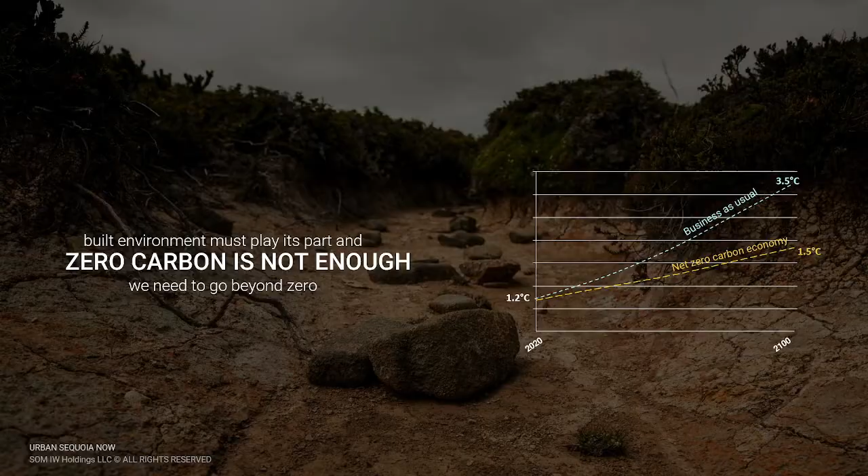So this premise would say, can cities, instead of being the primary contributor to global emissions, become part of the solution? We believe emphatically yes, that buildings can actively absorb carbon and that buildings can perform like trees. And this was our provocation at this pavilion last year at COP26. We made this provocation, can buildings act like trees?

And we proposed that with current technologies, with a combination of biomaterials, nature-based solutions, and active technologies like direct air capture, we could absorb more carbon than we emit. And this idea received tremendous support. And we've spent the last year focused on developing this very specific idea with engineers, with carbon specialists, with architects. And so we've been working to shift from concept really to reality.

And what I want to share today is focusing on one specific building typology, tall buildings. We've taken tall buildings, high-rise construction, as an important solution to urban density, but also as one of the primary contributors to carbon emissions and also one of the most challenging to address.

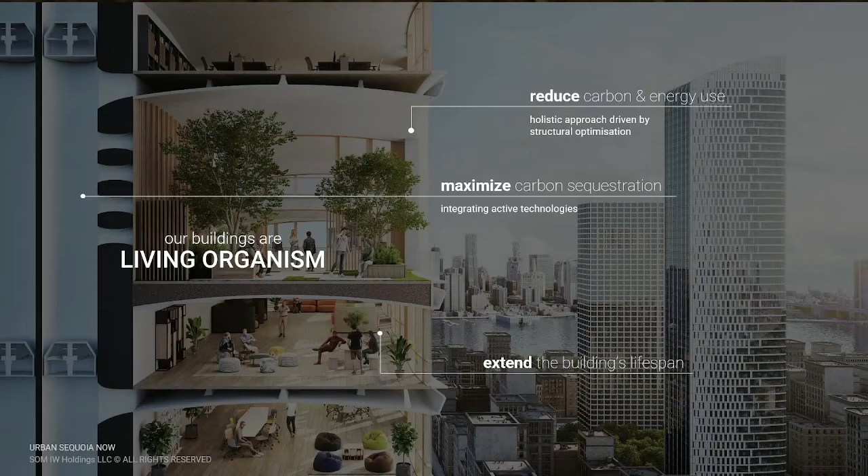So in order to do this, this is a scalable idea from small to big. We're focusing on tall, and that scalable idea means that we have to shift our thinking. We have to shift our point of view to think about buildings not as a static compilation of materials, but as living, breathing organisms themselves. And we have to think holistically about a dramatic reduction of carbon in the buildings to begin with, also maximizing carbon sequestration and extending the lifespan of those buildings.

So we, in this process, asked ourselves a series of questions. These are simple questions, but they're questions that you have to ask every step of the way in designing, from the smallest decision to the largest decision. As we're working on a holistic design, just how low can we go relative to upfront embodied carbon? How far down can we take that? And also, how low can we go relative to the active use of energy in the building?

And opposing that, how high can we go relative to carbon sequestration? Can we actually sequester more carbon than we've emitted? And how high can we go relative to energy production on site? And finally, we ask ourselves, just how long can we extend the lifespan of the building? Can we go beyond a conventional 60 years? Can we go to 100 years and really expand that whole life carbon cycle?

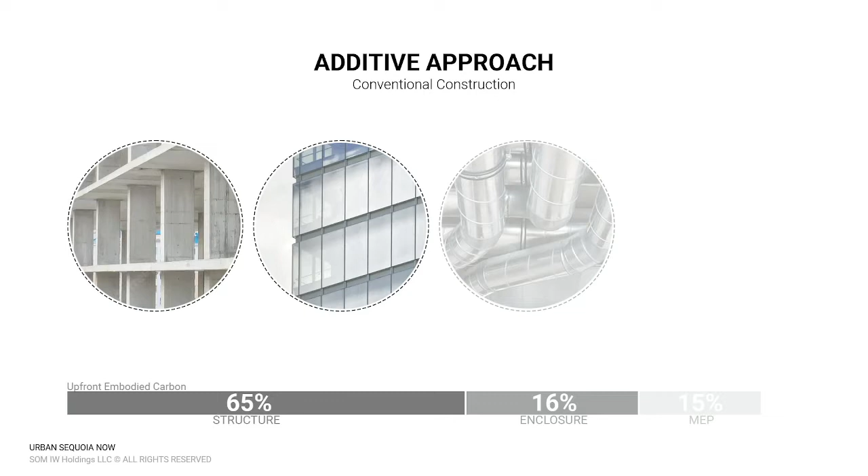So how do we do this? What are the specifics of this? First, we have to think very specifically about how we're building today. And today, all construction, and particularly high-rise construction, is sequential. And it is designed even by independent groups. Each system is designed independently, thought about independently, and added one after the other. And even built sequentially, which means that you're adding carbon footprint on top of carbon on top of carbon for each of these unique different systems.

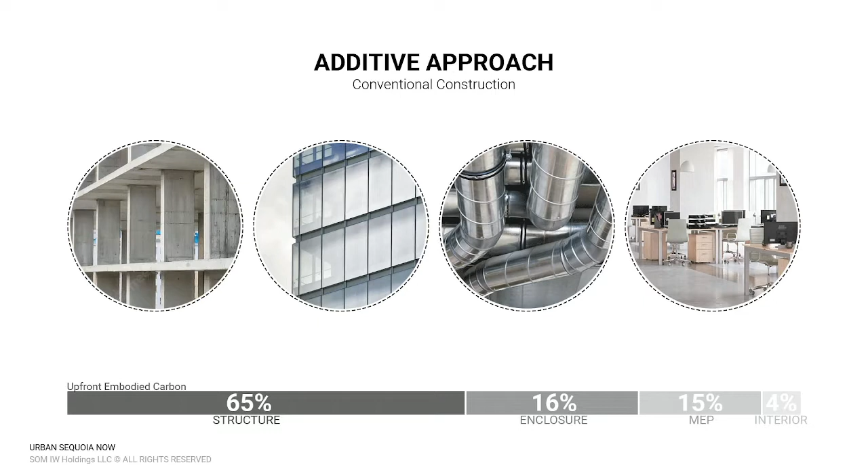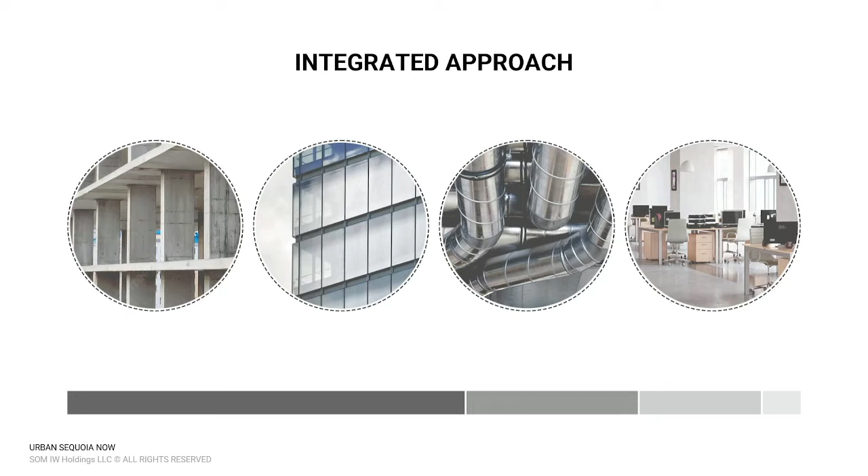So can we flip again this thinking? All of this is about inverting the conventional. So can we actually think about an integrated approach? Can we ask each system to serve more than one purpose, and maybe even three purposes? And so can we think holistically about all of the systems and bring them together to overlap in their use and in their function? So very specifically, this is conventional high-rise construction today.

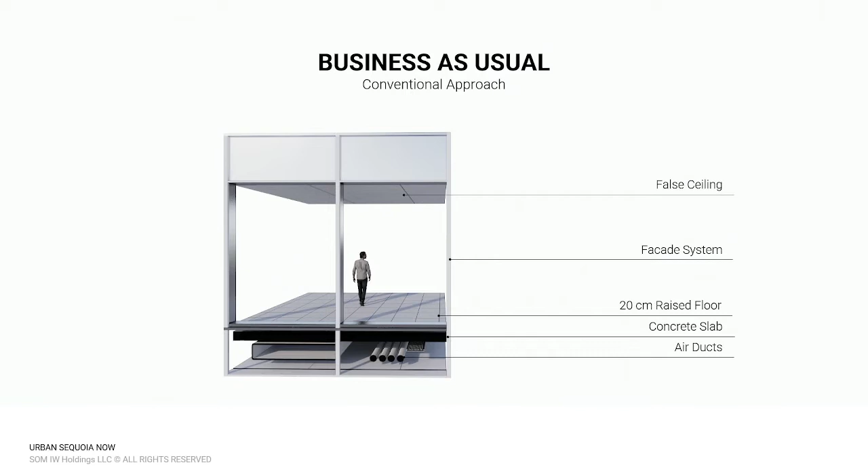Concrete slab, part of the superstructure. Then mechanical systems come in, they're distributed under that slab. A false ceiling that covers that. Sometimes we add a raised floor for wire management, like you see here today. All additive components. So we're proposing a new way of thinking that inverts this system and compresses this, which allows us to significantly reduce the amount of material in that structure. And then we have a raised timber floor that creates a cavity between that becomes the space for an integrated ventilation system.

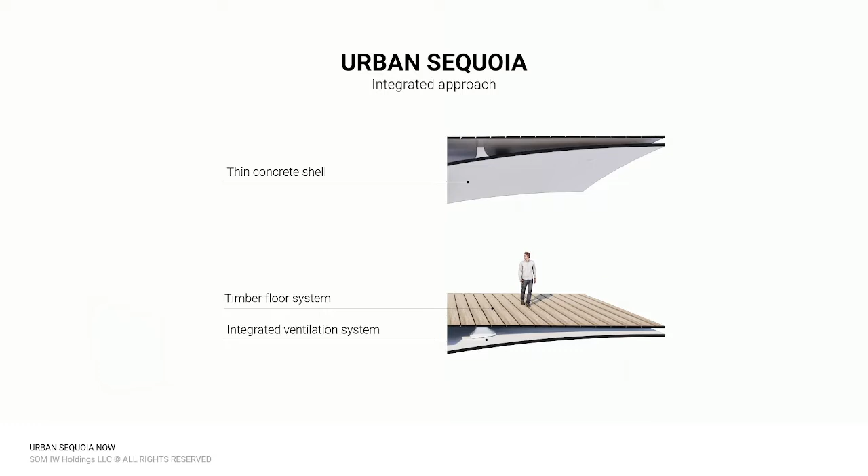So we're taking what is the conventional additive process, inverting that to a completely reductive design, consolidating and in some cases eliminating systems. So reducing the amount of material and reducing the systems and reducing the embodied carbon. So let's look at that specifically. If we think about the MEP system that's typically run in ducts distributed from space to space, where we are proposing a pressurized floor. It's done today, it works quite well. And so we remove essentially the duct network. We remove the false ceiling that's concealing all of the systems. We remove the additional raised floor for wire management.

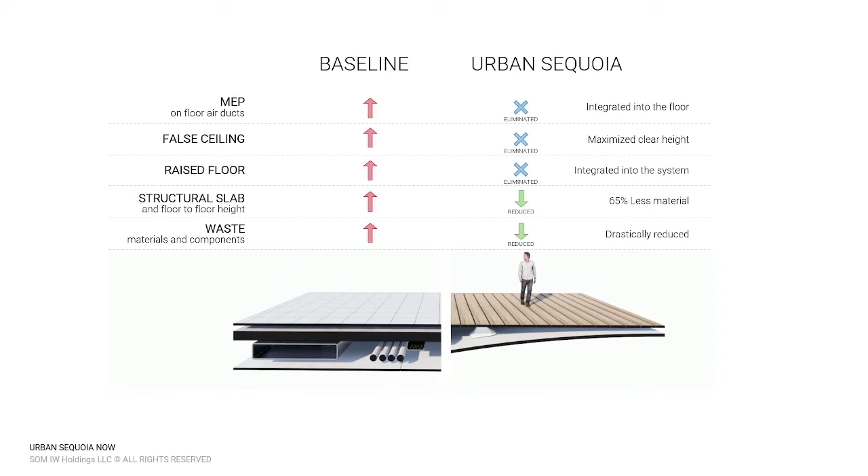And we significantly diminish the depth of the structural slab and the material in that structural slab with the vault structure. And we remove construction waste. And that happens because we think of this as an integrated modular shell structure. And so, the amazing claim is that we can reduce embodied carbon, upfront embodied carbon, by 70% from the conventional high-rise construction.

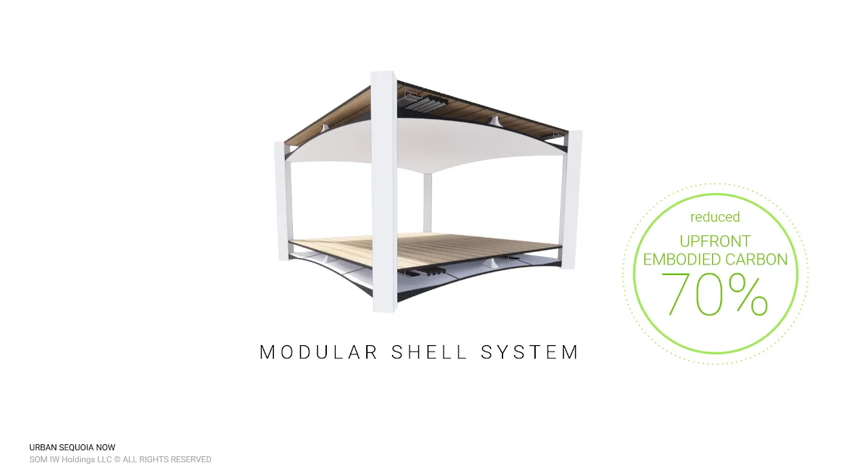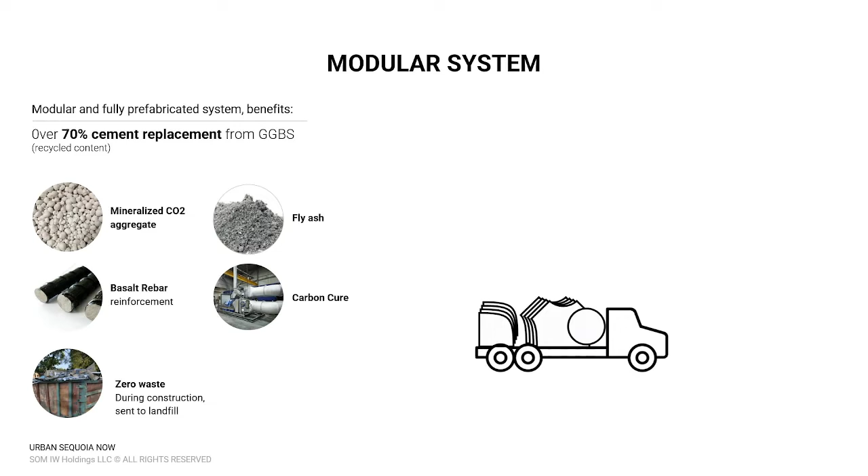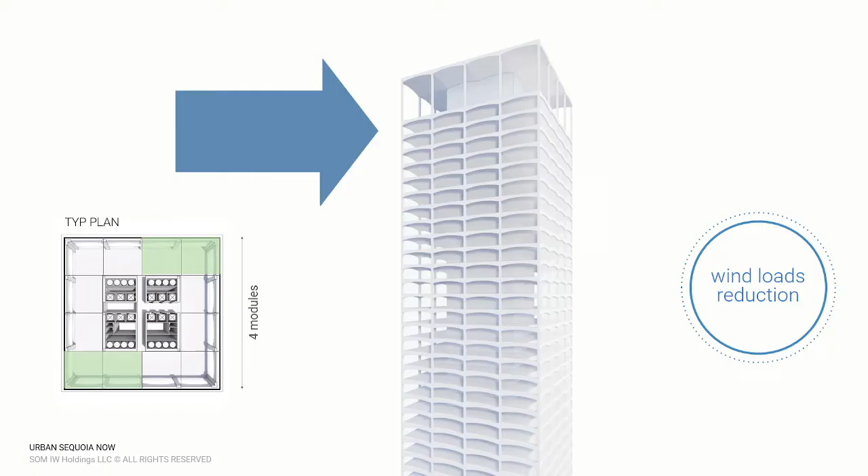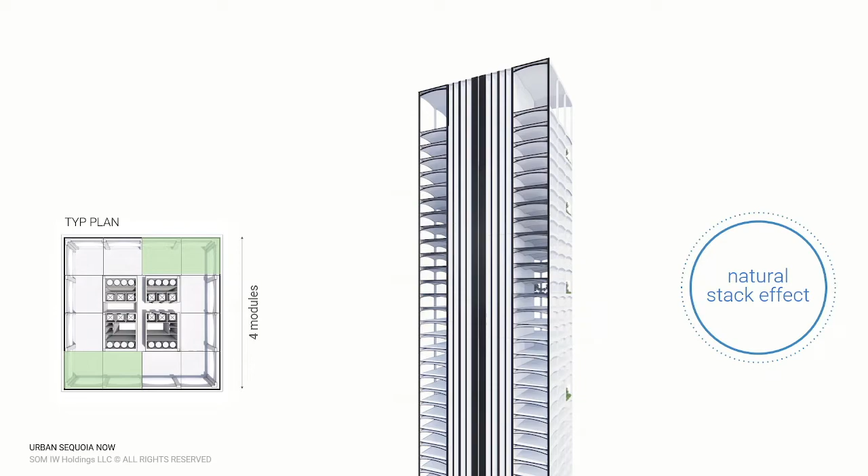And so how can we work to reduce the wind load? So quite simply, we're able to remove cutouts in the building, strategically placed, that literally confuse the wind flow around the building. And those cutouts can become active outdoor spaces or amenity spaces. So what we're proposing is to use the natural building physics, to use the natural airflow. And this is what's very important, is that because we're a tall building, we can introduce direct air capture into the building and use the natural airflow to our benefit. And so now we are truly carbon positive.

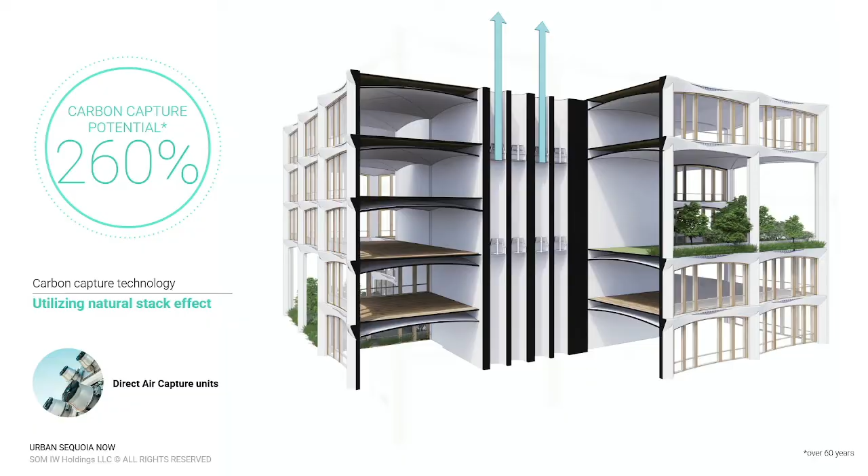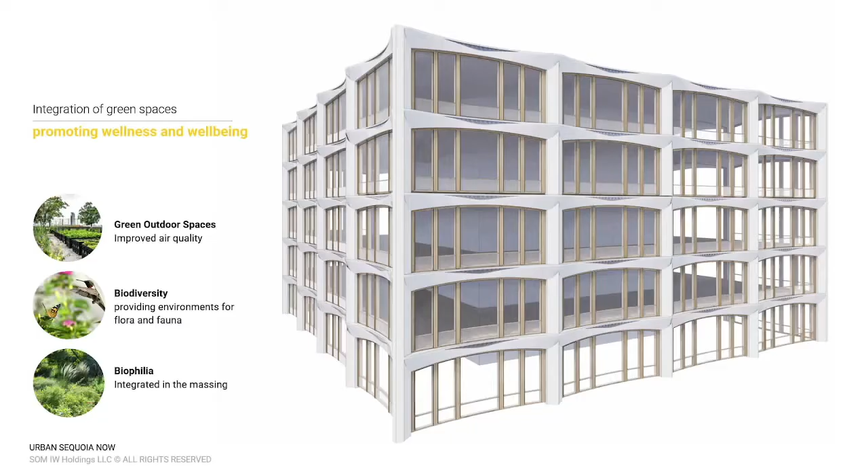So that natural stack effect pulls air in and up through direct air capture. We don't have to run fans on the direct air capture. We use the natural flow of the building in order to literally filter the air around us. So we now have a breathing building. And as we ask each of these components to do more than one duty, our cutouts, which are reducing wind load, really are outdoor gardens. It's an opportunity for us to introduce biophilia, introduce outdoor space to users.

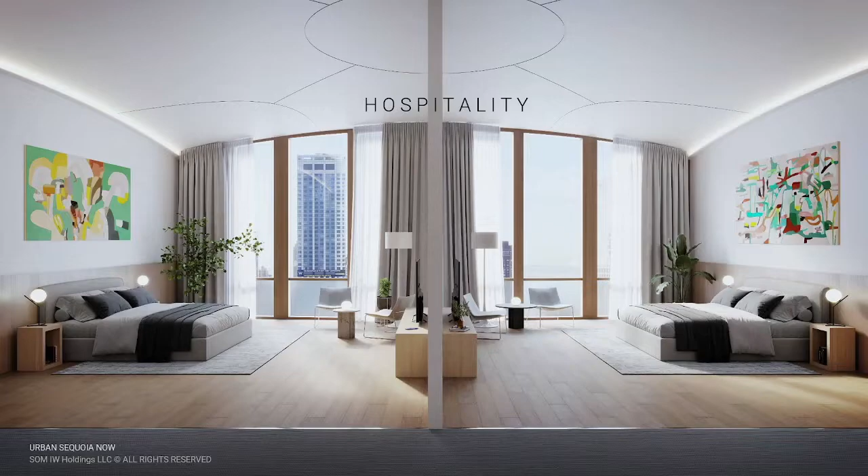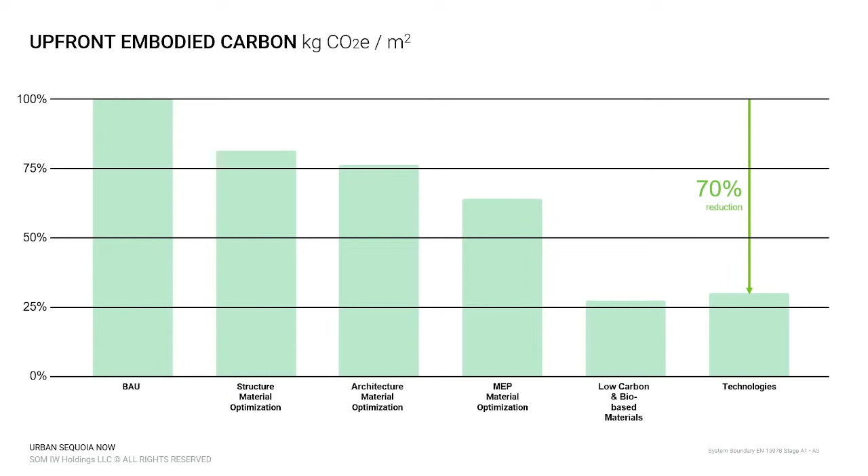So I want to look quickly at the numbers, and I think what's important to understand without getting into the specifics is that this is not a proposal for a great structural idea or a great mechanical idea. It's a combined holistic approach, embodied and operational carbon in a tall building, through all of the decisions and ideas that I just put forward to get down to, in 5 years, 100% reduction. And again, in 60 years, more than double that, and in 100 years, more than triple that.

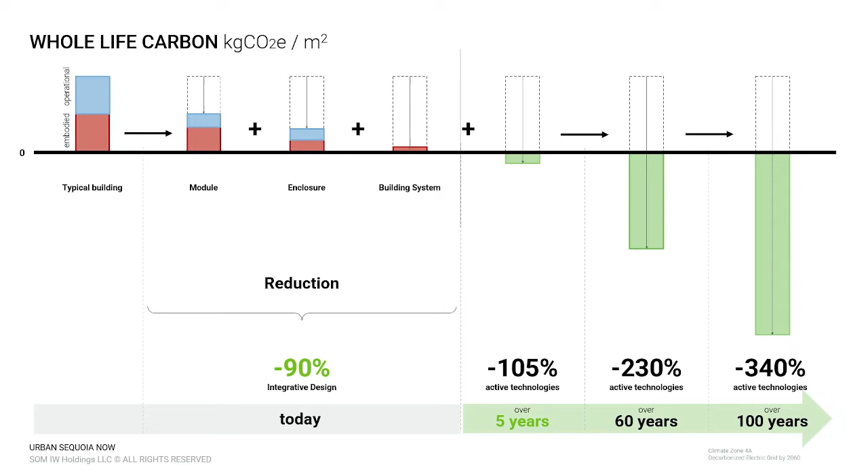So we show an idea of a system, a single tall building, but it's really not meant to be a standalone proposal. This idea can accommodate buildings of varying heights, buildings of varying programs, that together work to make a single carbon network, to make a carbon absorbing forest that can transform our districts and our cities into a single carbon network. And so I show you that we have flexibility of height, flexibility of program, flexibility of size. We also have flexibility of aesthetics as a system.

We think this is an implementable idea today. It's a real idea that gets us past what we're seeing on the charts on these walls. And I stand here as part of a really large team that's been working together, of advisors and an interdisciplinary team. And the point here is that the team has to broaden beyond us. And so we really do think that this is an implementable idea for now. And I'd like to share with you a summary video, and then I will conclude.

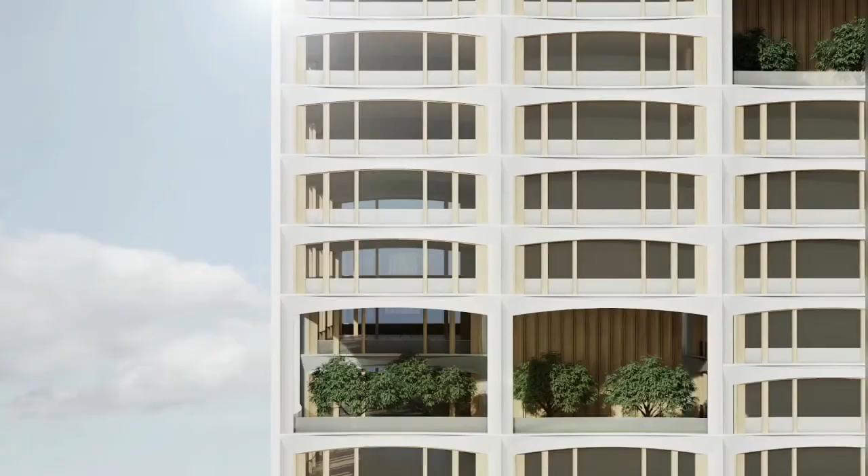What if our buildings were more like trees? Last year, SOM posed this provocation as the concept for Urban Sequoia, a building that absorbs carbon. And for the past year, we've been developing this concept beyond a building into a holistic design approach. We asked ourselves, how low can we go in emitting carbon in construction? How high can we go in carbon sequestration? And how long can we go in extending the typical building's lifespan?

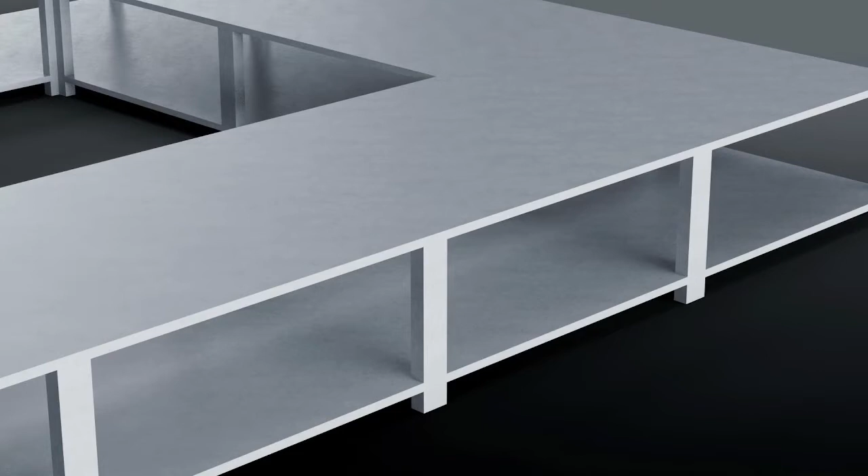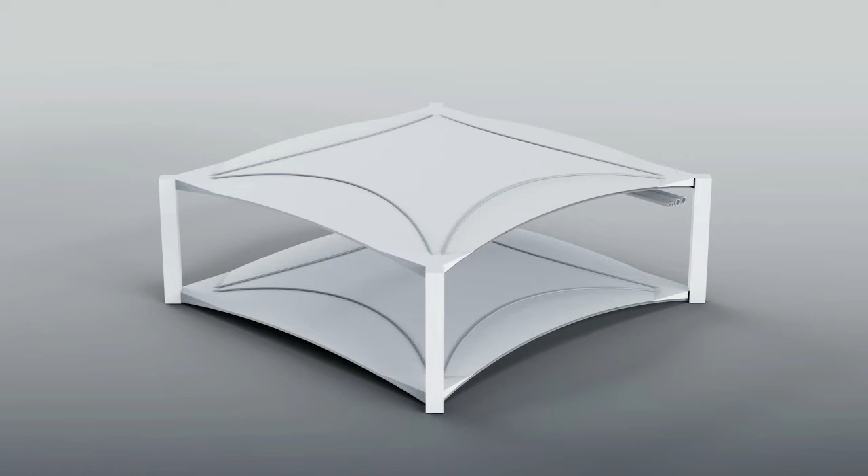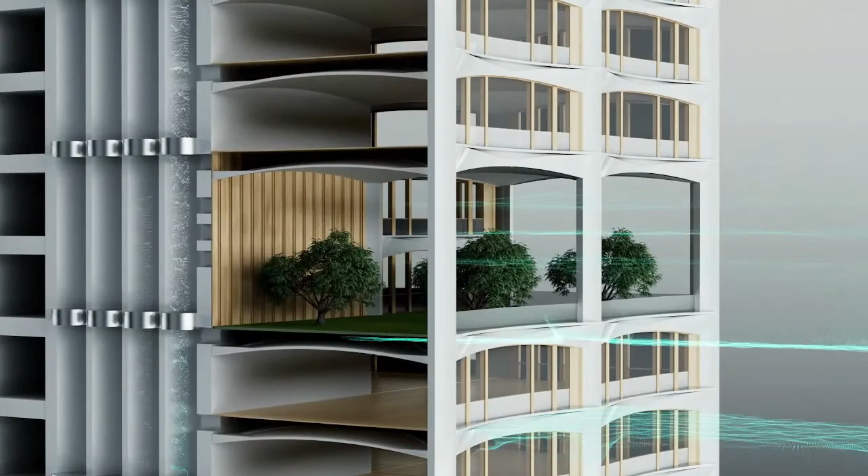Tall buildings are one of the largest and most ubiquitous building types in our cities today. They are also additive by design, starting with the structure, then adding multiple materials and systems, which increases embodied carbon and lowers efficiency. We need to transform the tall building into a tool to heal the environment. By reducing the mass of our structural shell, inverting and consolidating systems, and using revolutionary building materials, we achieve a radical reduction of carbon and waste. We also generate clean energy on the facade by using technology such as solar glass and photovoltaics. We go further by using stack effect currents with direct air capture technology to remove carbon dioxide from the surrounding air.

Lastly, we extend the building's lifespan from 60 to over 100 years by making the design more timeless and flexible so that it can adapt into the future. SOM's new approach removes 100% of a building's carbon emissions within 5 years and continues to absorb over 300% of carbon throughout the life of the building. This approach can also be applied to many different building mechanical systems. It's no longer a vision of the future. It is a holistic approach that turns concept into reality.